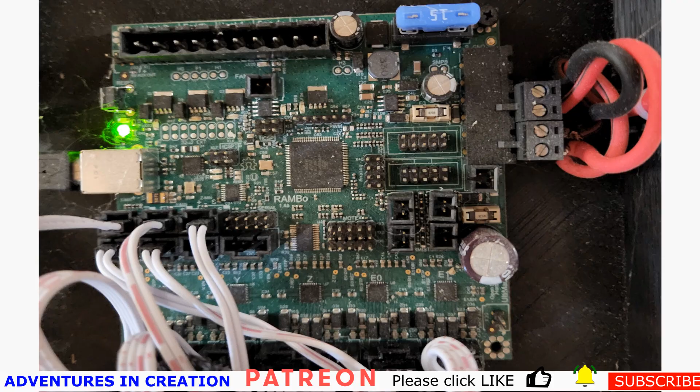Thanks for looking at the third part of this video series. In this part, we'll actually take care of the rest of the parameters, make this a fully parametric model, show you how we do that with separate parts and how they're fitting together, how we access the spreadsheet to make sure that we have the right clearance the whole way through, no matter what size we make the box.

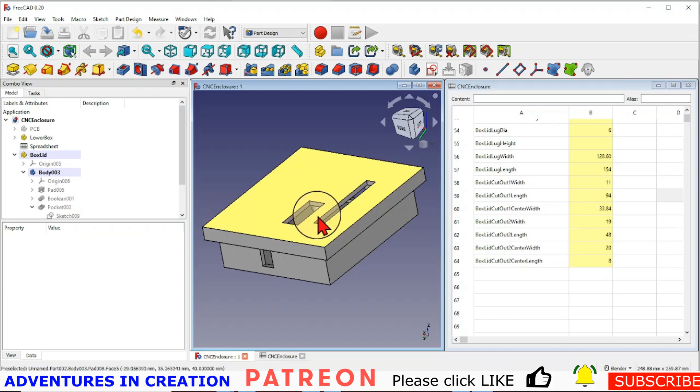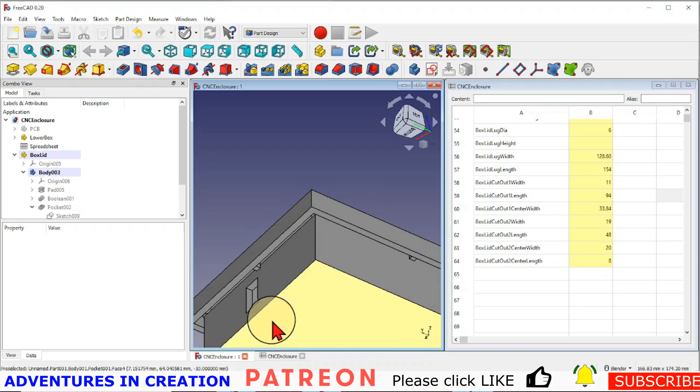Okay, so welcome back. And what I've done is I've created parameters that describe where this cutout is and where these lugs are. Here, these lugs, and these standoffs. And I intentionally left the clearance between the standoff and the box so that it wouldn't bind as it goes on, and allows for any distortion or anything we have. We don't want it to be a perfect fit because the lid would be tight.

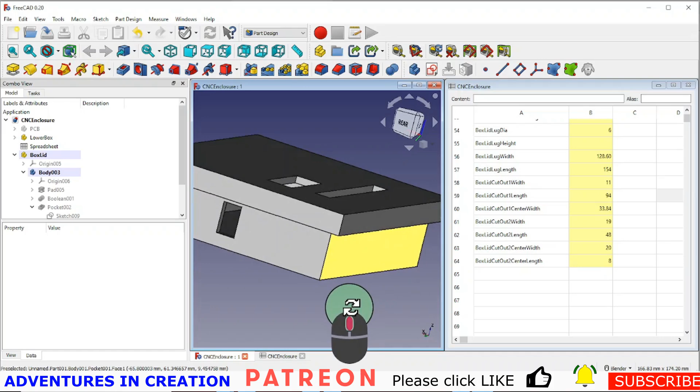And so what I've done is, now that lid has a gap there and air can come up there and flow through. I'm not going to put a fan in it because I don't think it needs that. I just don't want it to overheat. It doesn't produce a lot of heat. So a couple of things on my parameters. So as I said before, it's really important to keep your directions organized.

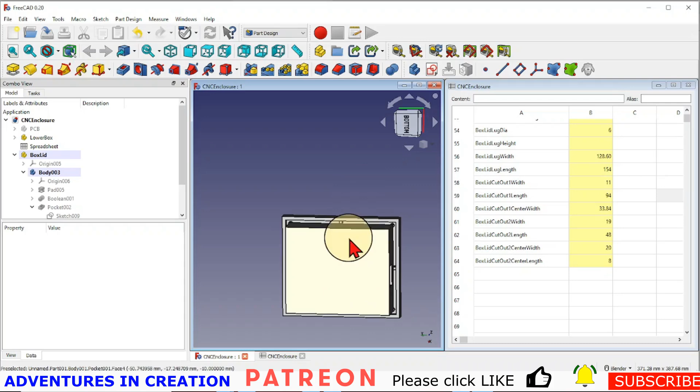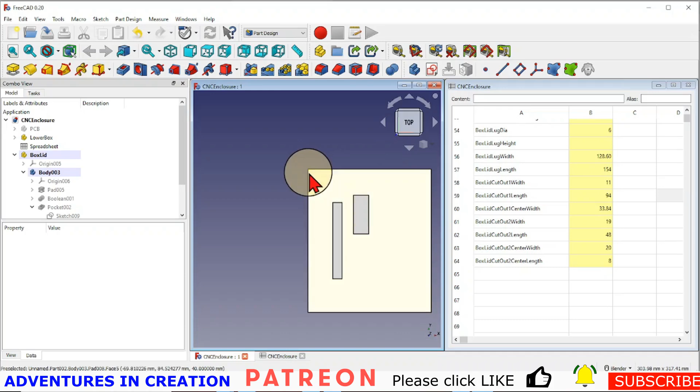So if I turn this box, let's put it back to the top view and get it that way around. So if I have it this way around, then this is my width, this is my length. And it doesn't matter if something is longer or wider, the directions are going to stay the same. The reason for that is you want to make sure that as you're naming things, you can understand which one did I make the width, which one did I make the length, and whereabouts did I dimension it from.

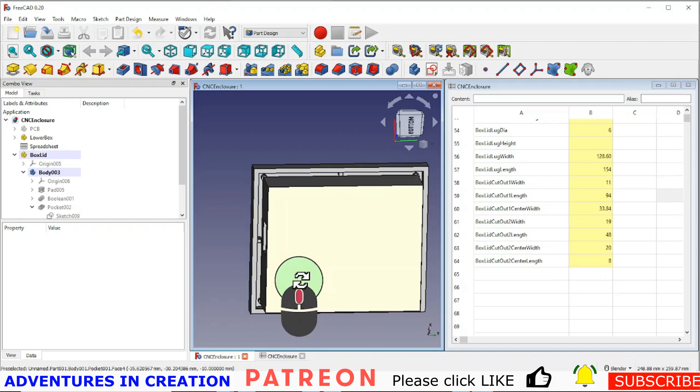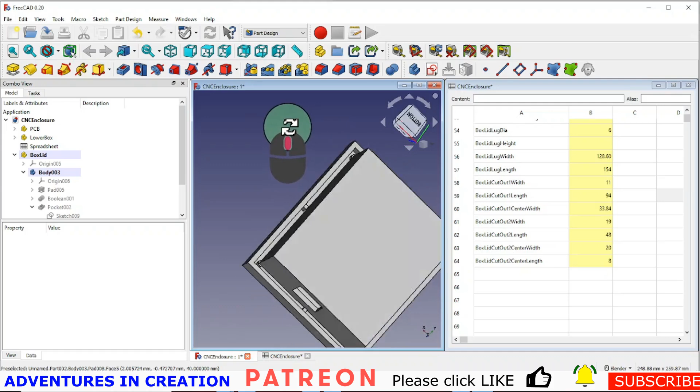So right now I have it all dimensioned the same way with the same width, length names based on whichever part it is. So right now the box lid and the box itself and the PCB all have the same length and width directions. Then the other thing that I think is important when we're doing this is that you try not to use arbitrary numbers. And I have done that, and I'm going to solve it right now, but I wanted to talk to you about it first.

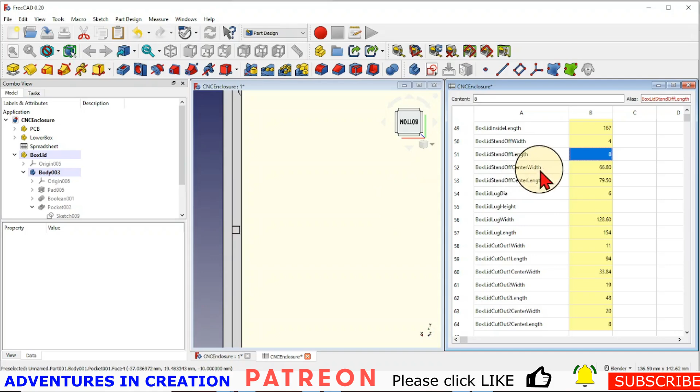So for these standoffs, go to the box standoff length, you'll see that number is just 8. And what that means is I know where this starts. That's my box standoff center width. My box lid standoff center width is from the center out to there. And so I know where that starts, but then I need to know how far should I go with this. Well, this is a function of how thick is this wall and how wide is this gap.

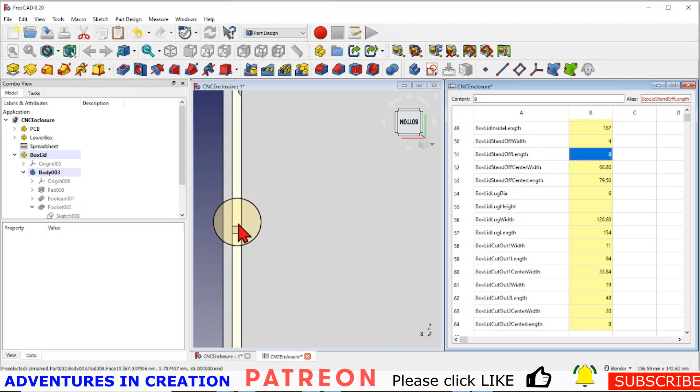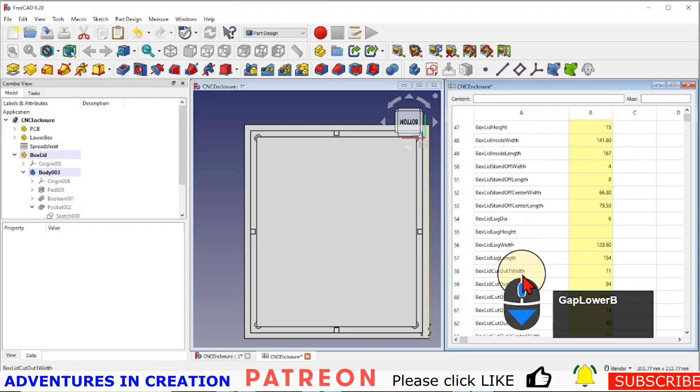So I think what I'm going to do is create some reference information, and one of them is going to be the gap between the body and the lid. So the lower box and the lid. So I'm now going to put those in a separate list here, and I'm going to call that gap, lower body, lower, let me just keep the name the same, lower box. So I'm going to keep gap lower box box lid.

I would like to put a dash in there, but apparently that doesn't work with the aliasing, so we're not going to do that. So that gap there I know is 5 at the moment, and it's an arbitrary amount. That one is one that I just created to be 5. But by listing it here, I can change it if I want to change it. So for now, I'm going to put it in as 5. And I'm going to just alias that. Just using that easy alias again, just to create that.

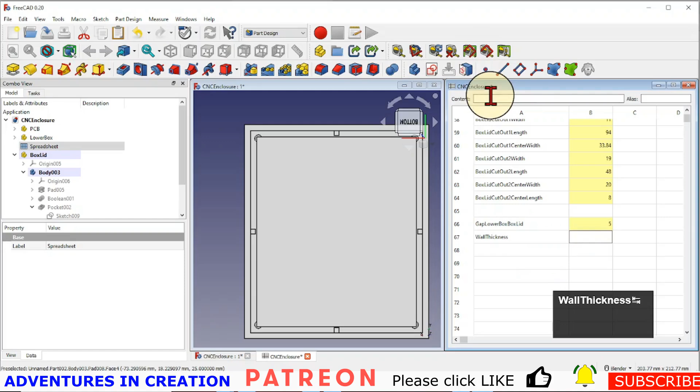So now I have that 5, and then this is going to be a function of that gap and this wall thickness. Now, I know that wall thickness is the same as the wall thickness that I have here. The lower box wall thickness is 5. So maybe what I'm going to do is put in a general one here that says wall thickness. And I'm going to make that equal to my lower box wall thickness. So they're going to remain the same. I'm just going to alias that one quick.

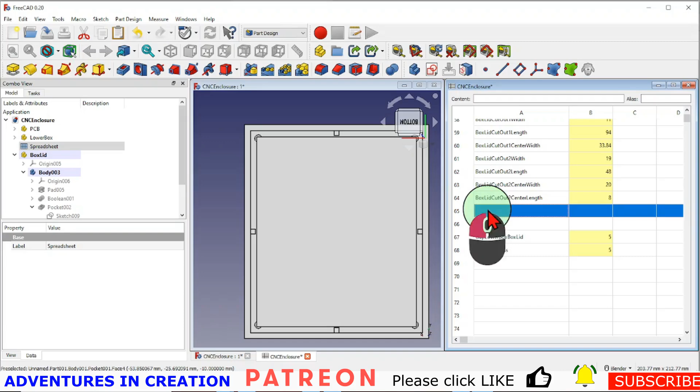So now I know this should be this gap and this thickness, and that would push it 1 millimeter out of the end. So I want to reference that clearance there. So I'm going to call this clearance. Actually, what I might do is I'm going to do it this way. I'm going to call it box lid standoff clearance. And that's 1 millimeter. I'm just going to hit that one.

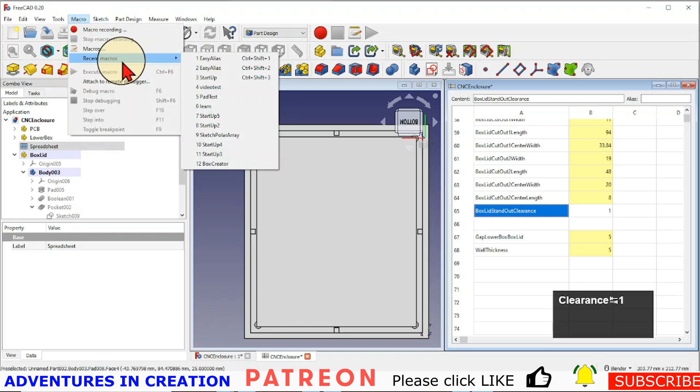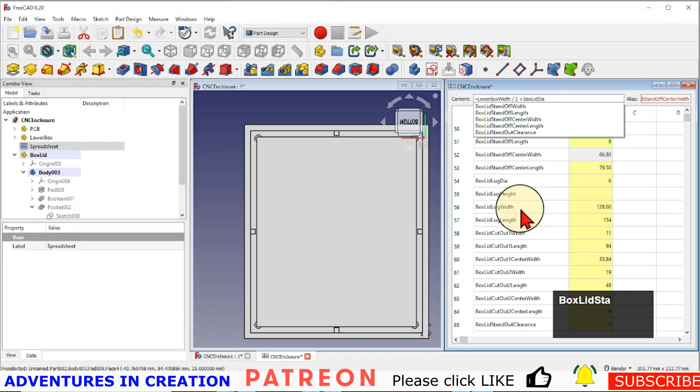Make that an alias. And then I'm going to go up to here where I have my box lid standoff center width. And I'm going to make that one the box lid standoff clearance. Standout should be standoff. I'm going to change that before I make a mess of it. Let's just fix that. I just don't want to call it something else and then cause it to be an issue. There we go. I'm just going to redo my alias just to make sure the alias is correct.

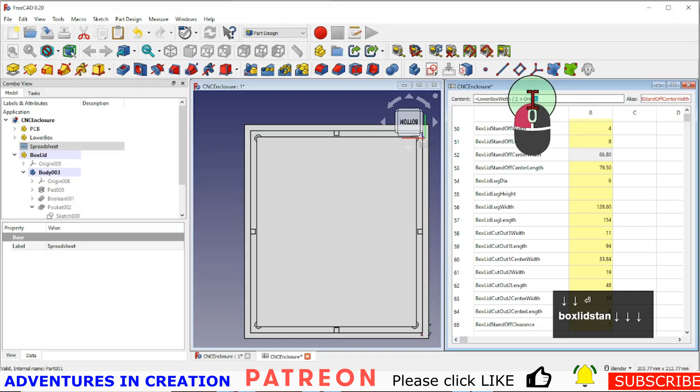So standoff clearance, perfect. So then I'm going to go back up here to my box lid standoff center width, and I'm going to make that box lid standoff clearance. And then this one. Oh. That's weird. And this one also is going to be box lid standoff clearance.

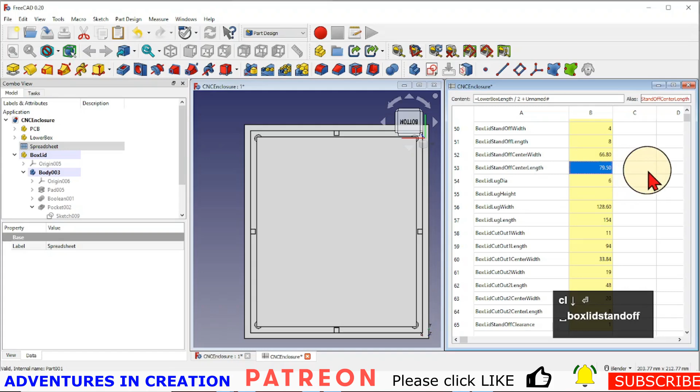I don't know why when I first hit that it comes up with something weird there, but I think it's just an artifact. I'm not going to worry about that. So now I know this clearance is what's being used here. So then I can make this length, box lid standoff length, is going to be my wall thickness plus my lower box minus my standoff clearance. I'm going to make it minus my standoff clearance times 2. That'll leave me 1 millimeter inside here.

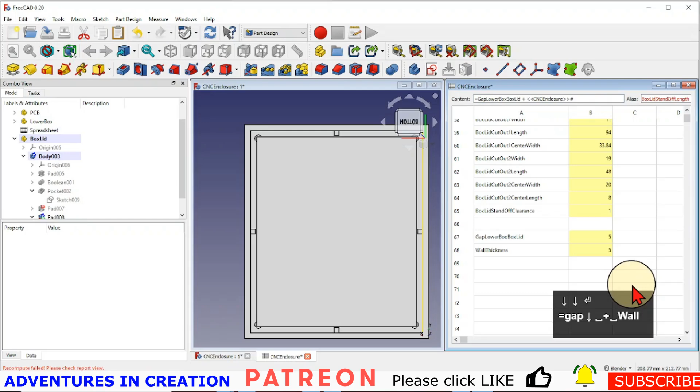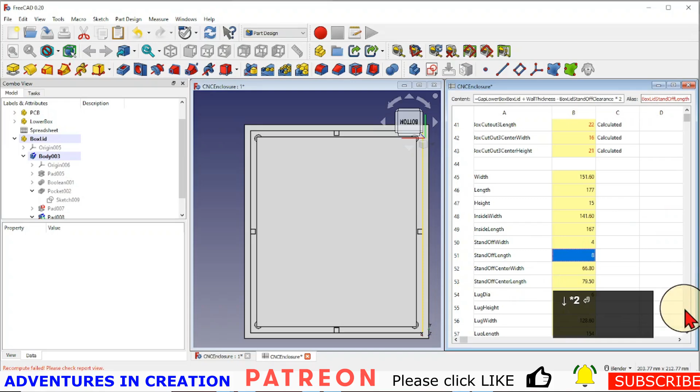So this one is going to be equal to gap lower box lid plus wall thickness. It's weird. It seems to pick up the wrong thing. Minus. And that one is called the box lid standoff clearance times 2. And there we have it. So now that's calculated rather than just an arbitrary number.

And it's based on my clearances. So that's basically how I like to do it. I don't want to have arbitrary numbers in this. I'm going to go through my spreadsheet once more and just check. And if I find any, I'm going to come back and show you how I fix them.

Okay, so finally we have everything parametric. The components themselves don't really move around the board, but I can change the board size and it will change the size of the enclosure. I don't expect my enclosure to change that much, but I'm going to measure my centers and my board width and board length, and if it's minor modifications, everything will just modify automatically.

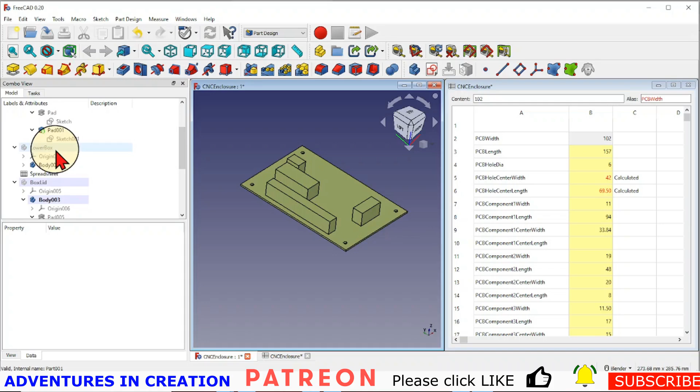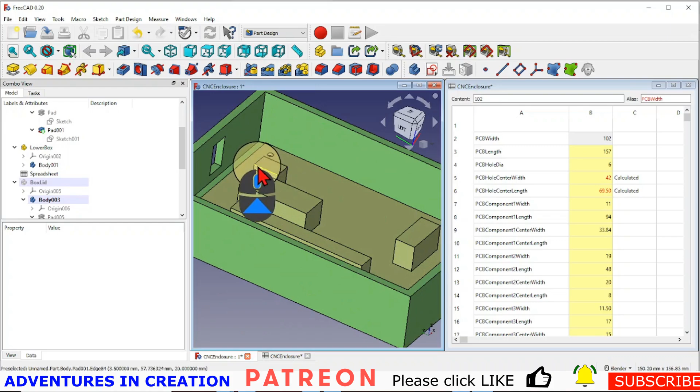So let's start out by turning on, this is the PCB obviously, we're going to turn on the lower box, and I'm going to assign the lower box a random color. Just do it to that body. There we go. So now the box has a color as well as the PCB, and then you'll be able to see the lid on top of that.

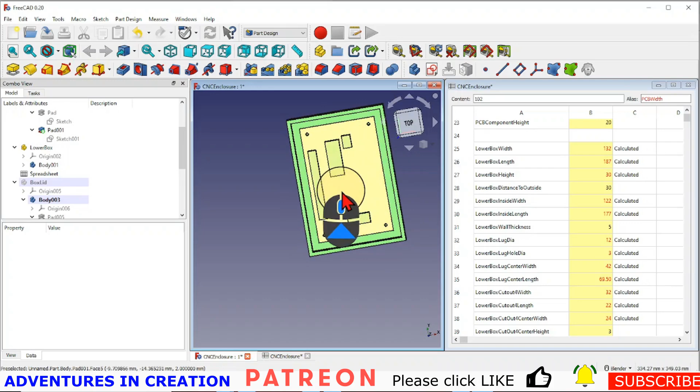So first things first, I have a set amount of clearance from the PCB to the inside of the box, and I gave that a dimension. Lower box distance to outside of 30. I can modify that independently, and I did that on purpose because I wanted to be able to modify that clearance around there, because depending on what fits in there, I might want to have a bigger space.

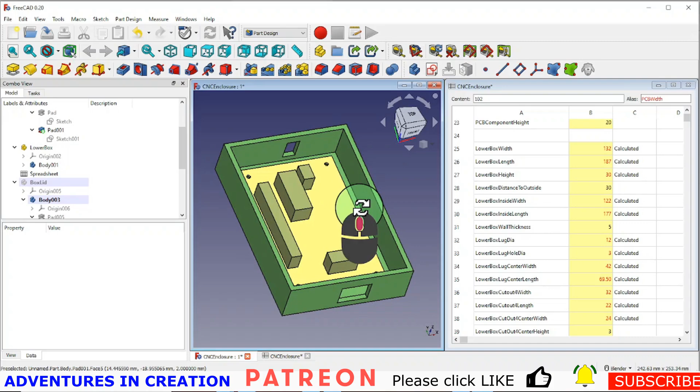I made it equal all around because honestly the size of the box is not important. The outside size is not important for me. It's going to just sit on top of something. It doesn't slide into a space or anything like that.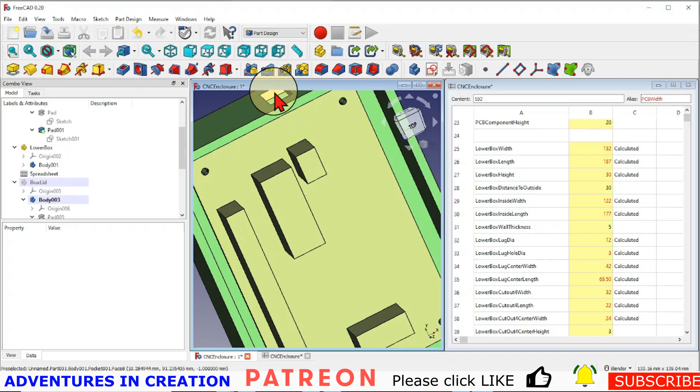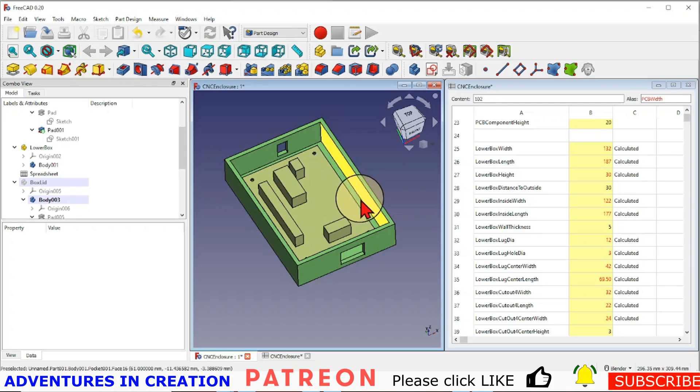So the other thing that is set up parametrically is where this component lies is where this cutout is going to lie, because the wires go out of the front here and go through this cutout, and the same on this end, they go out here and come out through this cutout. The wires from this component go out through the roof, and the same with this component, they go out through the top. So there's not enough space, or you don't really want to bend the wires over from there at 90 degrees. That would probably be a bad solution. So I'm just going to go straight up through the lid. And my lid, I'm going to drop that on.

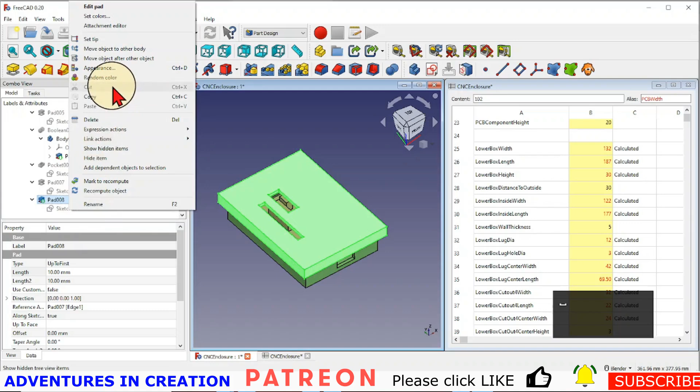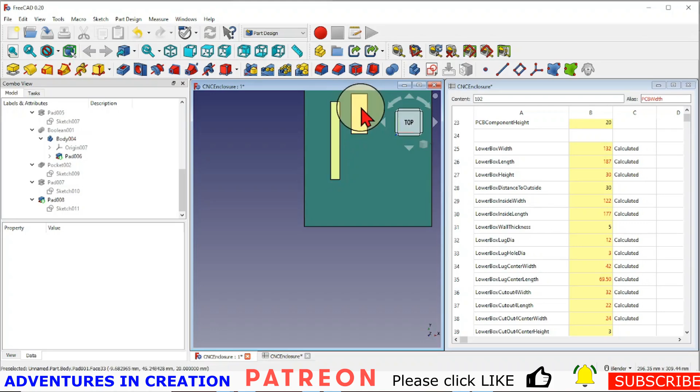There's my lid. And I'll give the lid its own color. There we go. So now we have the lid. And the lid is intentionally overlapping. And there's the cutouts for those connectors. If we look from the top view, you'll see I made them the same size as those connectors because actually the wires sit inside of those connectors, of course, because they plug in with another connector. So that's plenty of space there to get the wires out.

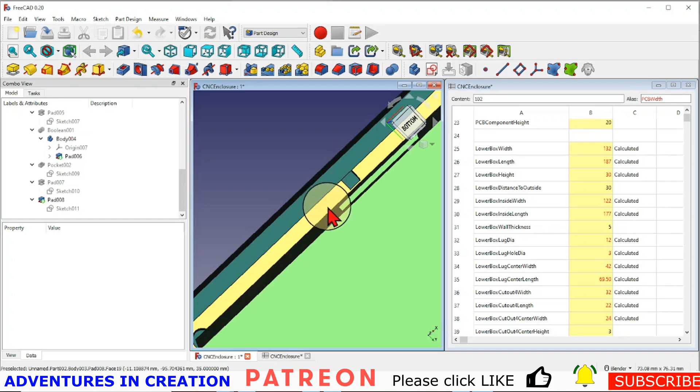And then the piece that I wanted to do was to create these standoffs so that the lid is a bit wider than the box, and that standoff prevents it from jiggling around too much. And then these little lugs hold the lid up from the box itself. And that way I've got airflow that goes in through here and go the whole way down.

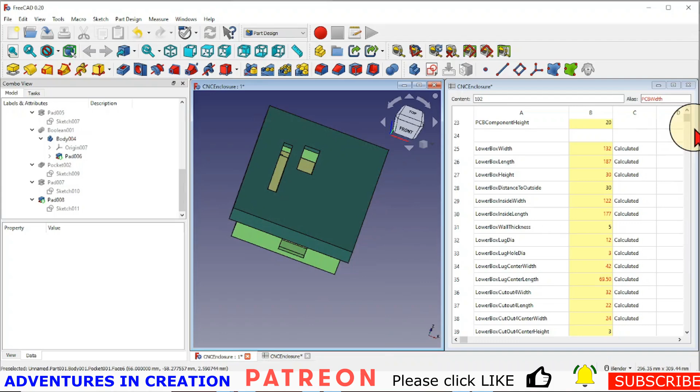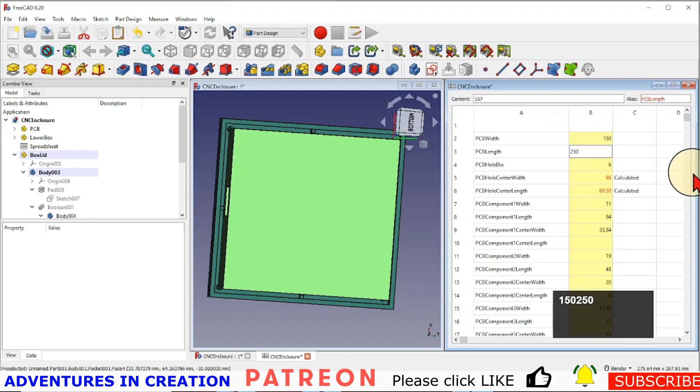So parametrically, of course, I can change the size of the box. And I do that by changing the PCB. The PCB is the driver for all of this. So if we look here, we can change the width. Let's make it something arbitrary. This is the width of the PCB we're changing. Let's just pop that over there so you can see. So that's my PCB width, my PCB length. And you can see everything moves and stays on point.

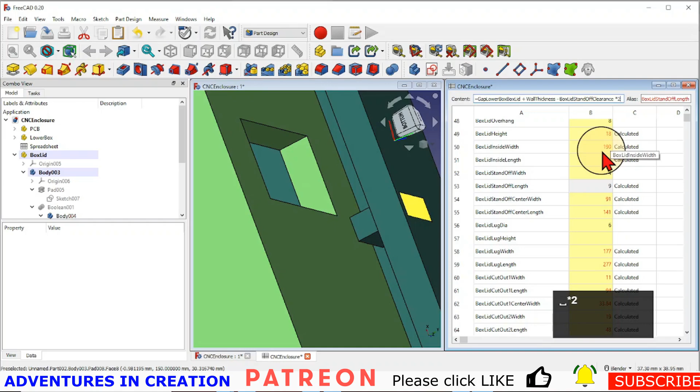And this is one thing I don't like there. It looks like my piece here is just sticking through too far, so I'm just going to change that length. That one would be in our box lid standoff length. And we're going to make that the clearance times 2. And that will just get rid of that. It just moves that edge back inside there. So I want to make sure that is correct. And yeah, everything looks good.

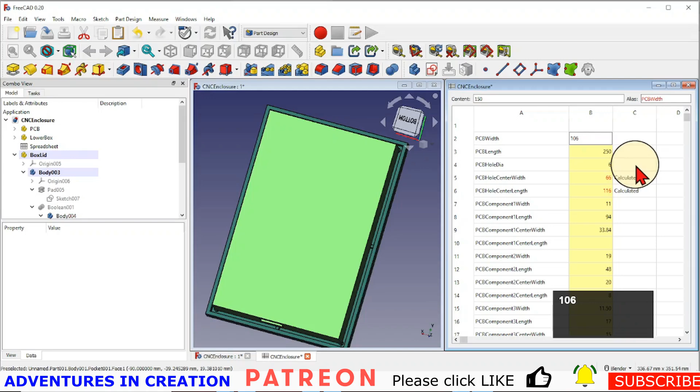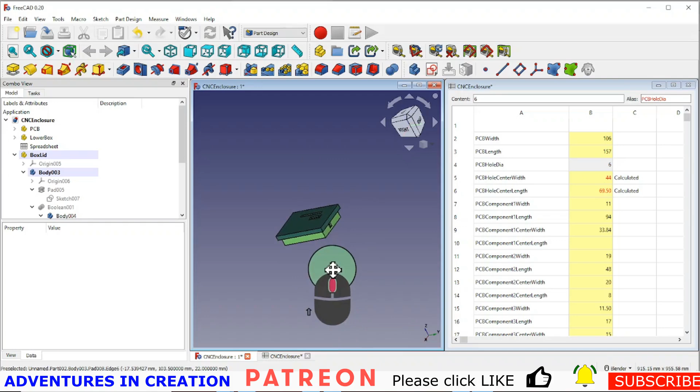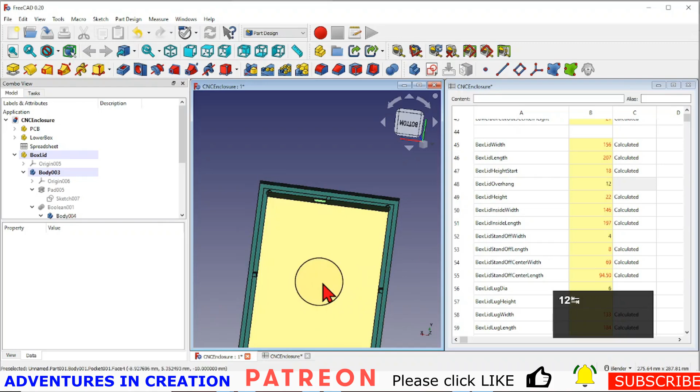Bring those sizes back down now. Back down to 106 width. And we'll go to 157 length, which is about where mine should be. And so you can see I have the lid there. Now the one thing I did do as well is I made it so I can change the overhang of that lid. So if I want that lid to overhang, let's say box lid overhang is set 8 right now. If I wanted that to be 12, for instance, I can just adjust that and it'll make the box lid overhang and it'll fix these lugs and everything so that it fits correctly still on the lower box.

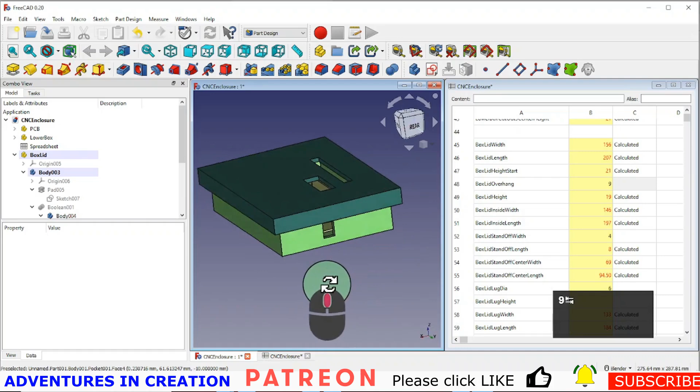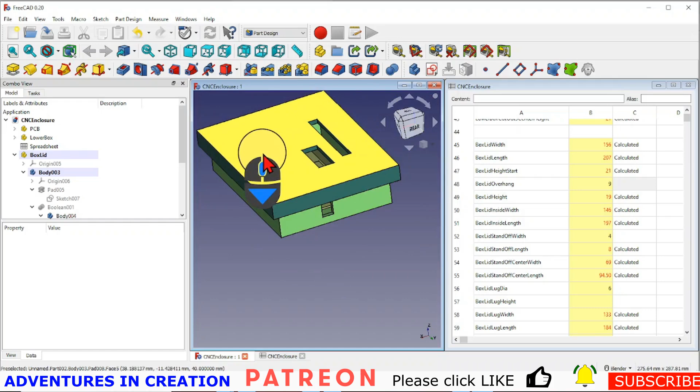And then what I'm going to do is I'm actually going to move that to 9. I think is better. Yep. So maybe we'll go with that. That way I can change the overhang, the amount that it overhangs there if I want to. And everything else is parametric. And I think what I'll do for my final piece is I'm just going to add some radii. So before I do that, I'm going to do a save, because whenever you add radii or you do something that could potentially blow up your model, it's a good idea to do a save.

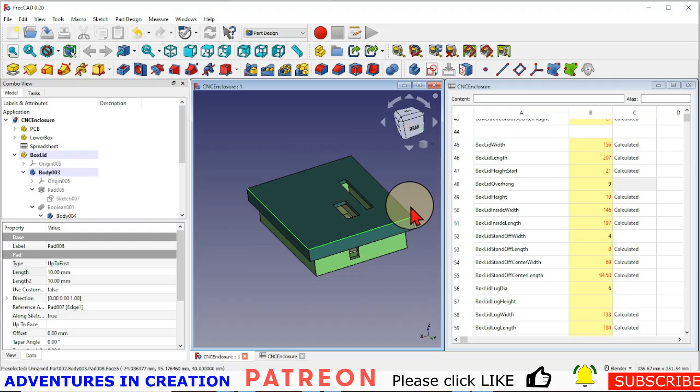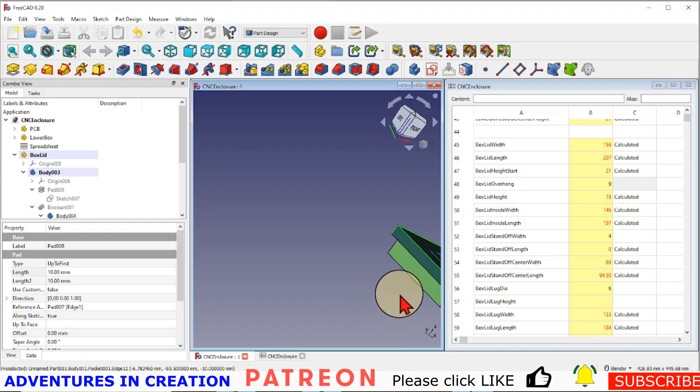So I'm going to press Shift and just select these. Make sure I've got the active body. It doesn't seem to want to hold. Press Control and hold them. Seems to work. There we go. And I'm just gonna put them on this way. This way. Here. So that's all the edges around there. And I'm just going to apply a radius. And I'm going to make that radius 2 millimeters, so it shows up.

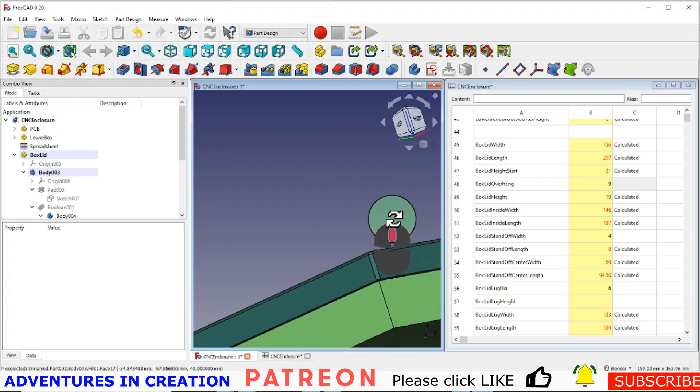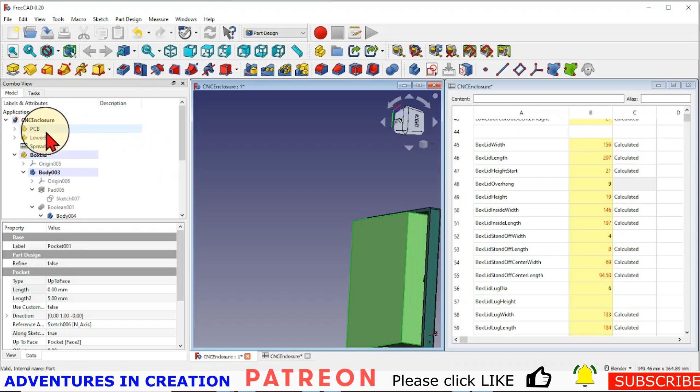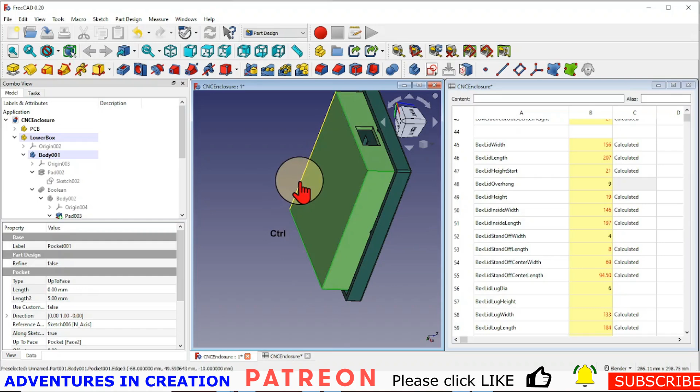And I'm going to do the same thing for the base, all those edges. Give those a radius. Gotta make my body active. So let's redo. Sometimes if you're switching between bodies or you've got multiple bodies in one model, it's easy to get the wrong piece or not make a body active. And of course, FreeCAD will yell at you and tell you what you did wrong. It's not really wrong, it's just not done. And there we go. And we're going to make that 2 mil as well.

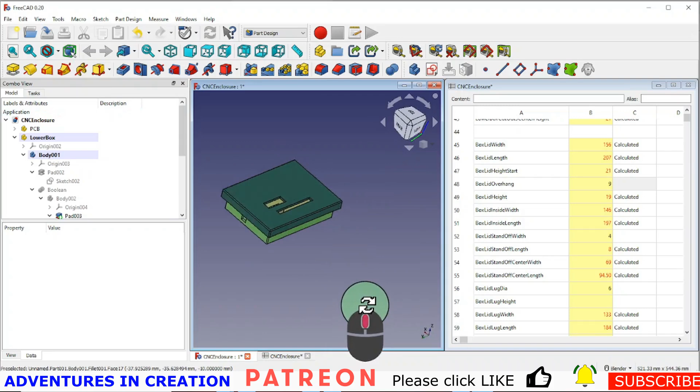And then we have the radii. And although it looks a little strange, I think that's going to work quite well. That'll keep everything mostly dust free and it'll allow the air to circulate. And I think that'll work good for me. So I may print it out in the future. I'll show it to you if I do.

And I'll just walk you through quickly through this spreadsheet because this video is going to be long. So all I did is I created all the dimensions for my PCB. Most of those are not calculated. I did calculate the hole center widths so that it kept the holes out in the corners when I changed the size of the PCB. I thought that made sense. So all of the PCB parts are set, and then everything else is calculated off that. The ones in red are my calculated ones, and the ones in black are ones that I can change.

So I want to be able to change that distance to the outside, so I left that. It's not a calculated amount, it's however much I want it to be. And then I calculated everything else from that PCB and basically allowed some modifications like the overhang I can modify. But you'll notice I also split up my parameters, so these are all in the lower box part. These are all in the box lid.

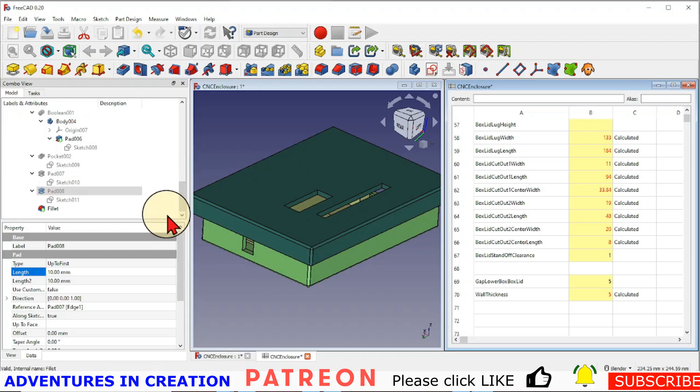And then these are some general ones that you can access. And of course you can access all the calculations done in the spreadsheet and then applied as dimensions. Now there are one or two pieces that are applied to things like offsets. So if you have an offset for a sketch, for instance, there's one. You can see I had set this up to the spreadsheet lower box height. So anywhere where there's offsets for pads or offsets for sketches or depths for pads that are calculable, I used the spreadsheet to set those dimensions. So those are parametric too.

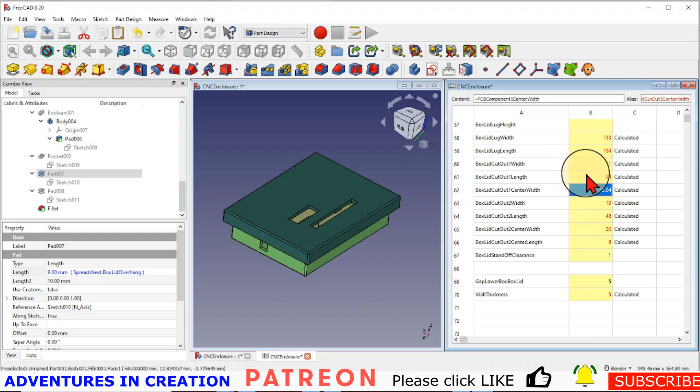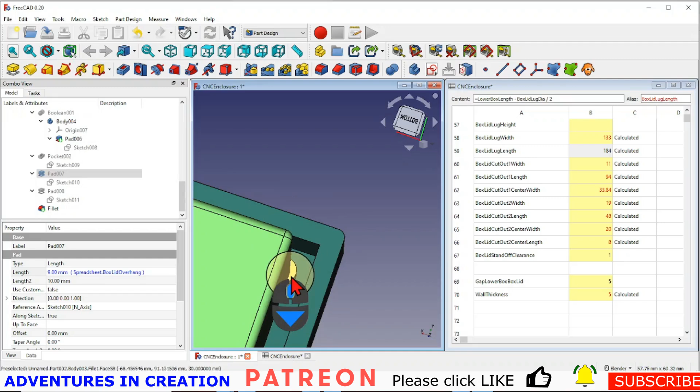So for the most part, this box is all parametric and will always fit the way I want it to fit and should work nicely for my electronics. So that's basically it for this one. I could go into more detail on the calculations, but I don't think I'm going to because it gets a bit complicated. You know, just knowing what things are related to each other. So for instance, if I look at this lug here, the position of that lug is the length of this box minus half of the diameter of that lug.

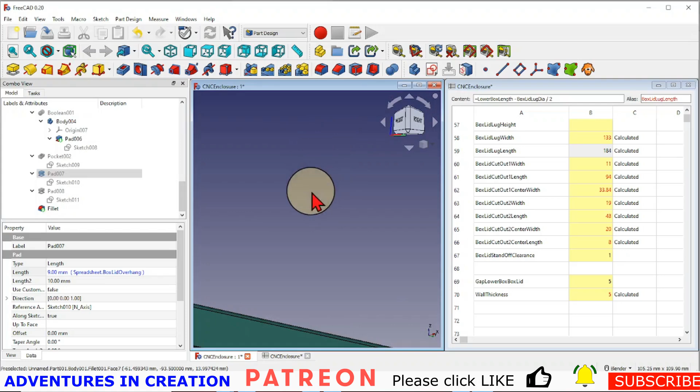So these are all things that you can pick arbitrarily. You come up with your calculations, how they're going to work. All you need to do is to make it so that your calculations are always driven by a certain dimension. And in my case, the PCB is the driver. So if I change the length and width of the PCB, my box changes around it. And the way my lid fits is always set and changes around the size of the PCB or the size of the box.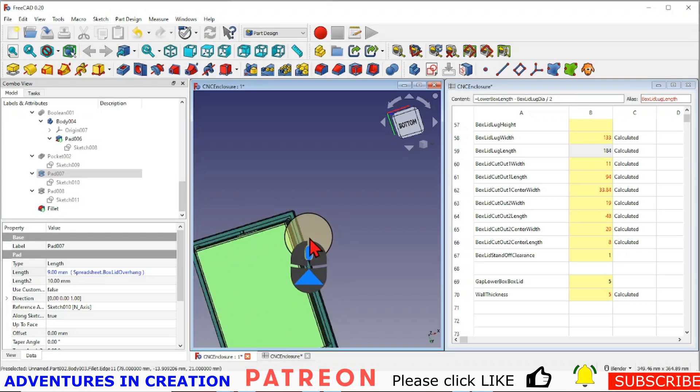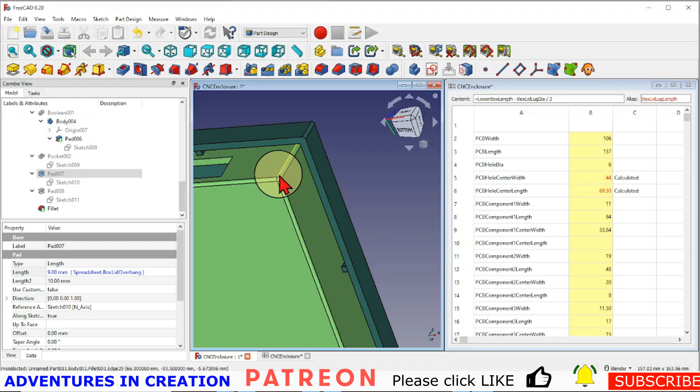And so you can build a complete parametric model as long as you decide where your drivers are and you lay things out sensibly, and you try and keep the width and length organized so that when you're coming to add those dimensions, you can pick them off the spreadsheet and they make sense to you. So that's an important part to remember: you want to make sure that they make sense to you, because if they don't, you'll get lost very quickly.

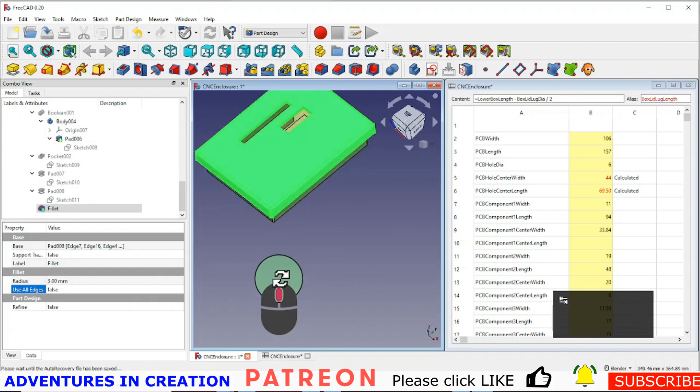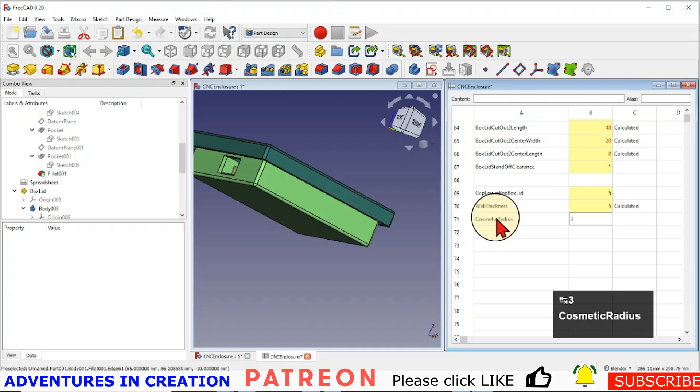So change that to 3. See how that looks. I think it actually looks better with a 3mm fillet, so I think I'm going to change that one as well. And of course, to give you an idea for these general ones, if I come down to my spreadsheet here and I say cosmetic radius, and I call that 3 for now. Gonna hit that guy, spreadsheet, link that one.

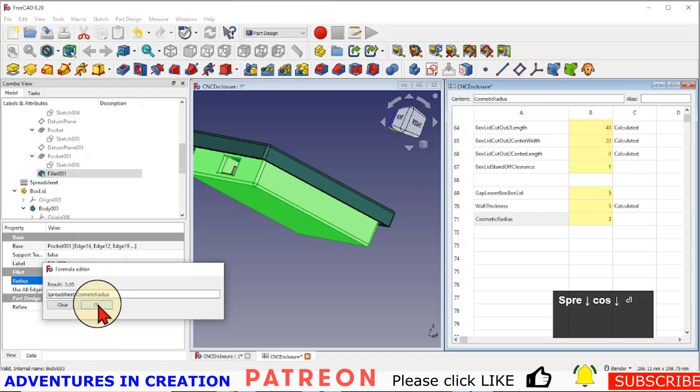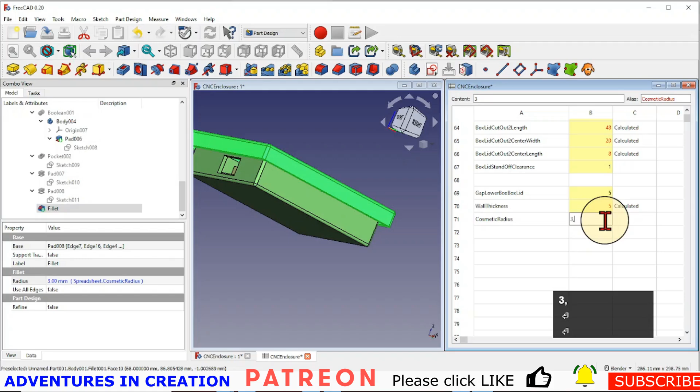Now I'll go into my radius here, click on here, say spreadsheet, cosmetic radius. Say okay. I'm going to go down to this one and say spreadsheet cosmetic radius. So now they're both set up here. So if I wanted to change the radius now, I can just make it a little bit bigger.

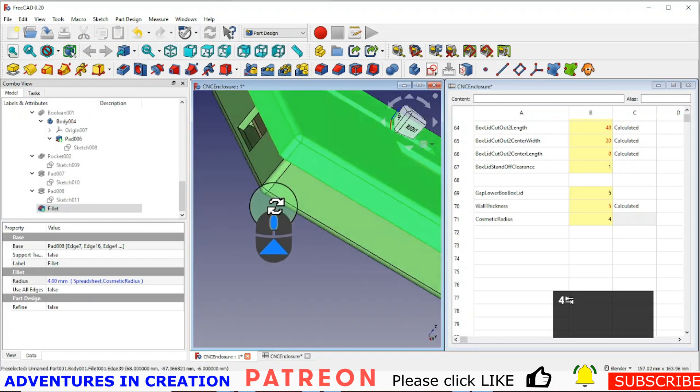Doesn't look bad. 4, what 4 would look like. So that changes it to 4. Could even go to 5, I guess. Just for grins and giggles. Yeah, it might look better with the bigger one. So yeah, let's go with the bigger radius and leave it at that.